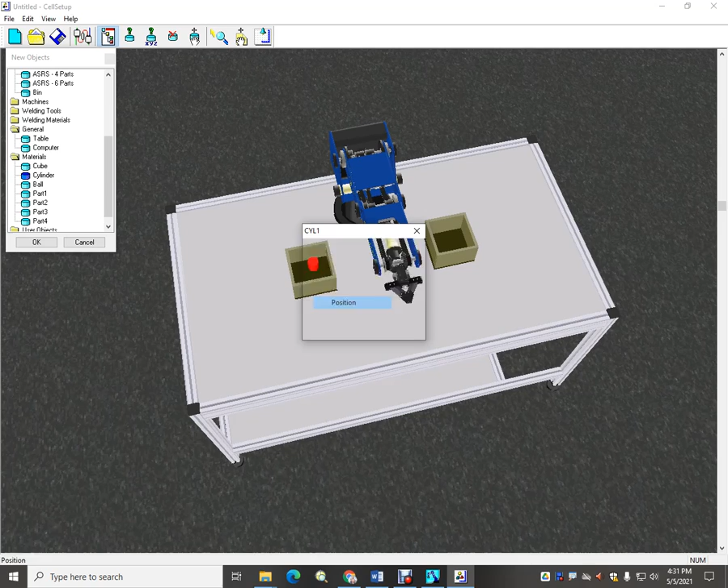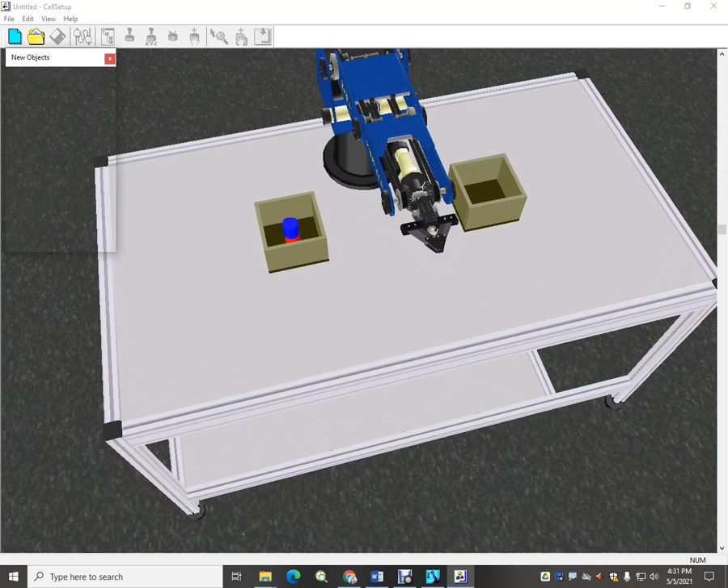We're going to place 2 cylinders inside the first bin. Red will be the first one. We'll locate its position at the same as the bin, 250, -260. And then we'll place the blue cylinder on top of the red. Be sure that you really zoom in. Make sure that blue then sits on the top of that, giving it the same position as 250, -260. Okay. So this is all that's required of our setup.

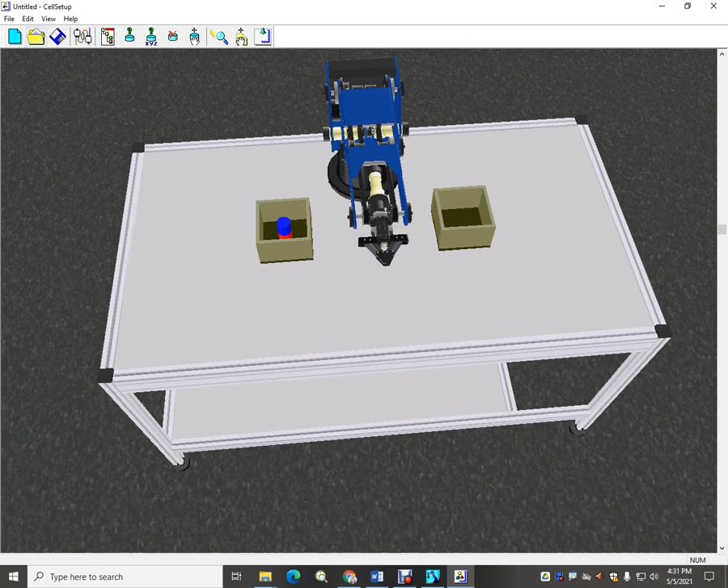Go ahead then and file, save as. Make sure you put it to the desktop; it is the easiest place to find it. And then let's save this as robot number 6.

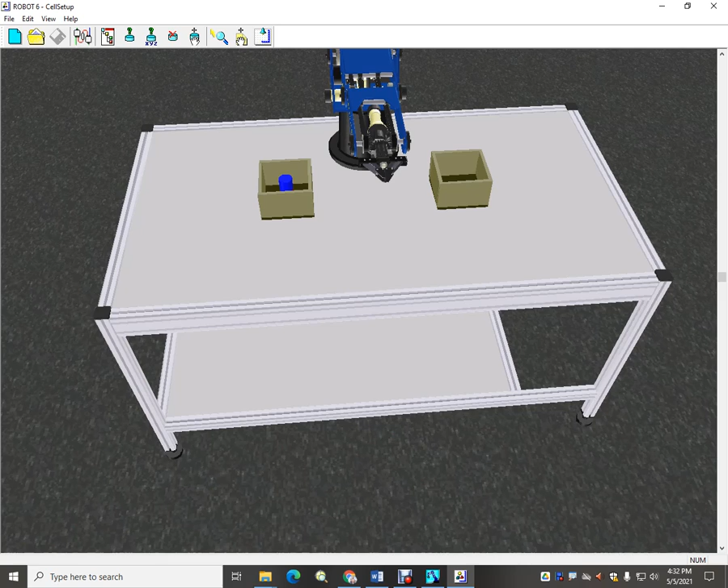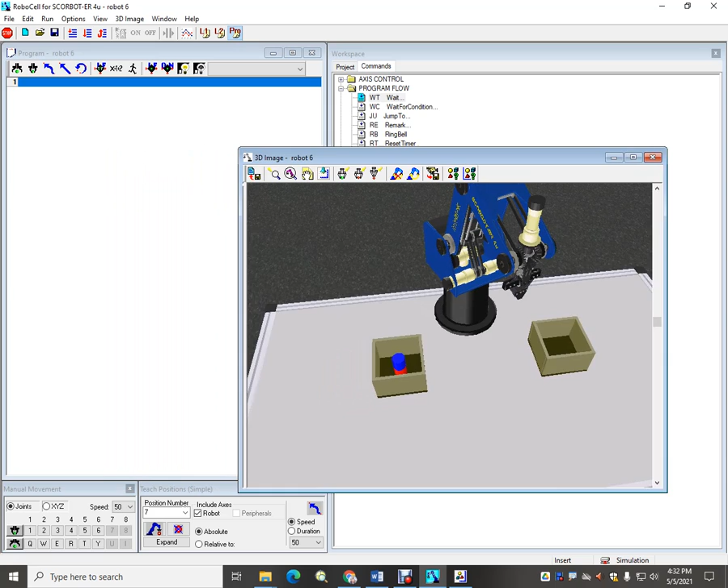Okay, I did it earlier today, it already exists, so that's okay. And we'll have it set the way we want it. Now, I'm going to go get our RoboCell. I have taken some shortcuts here though, in that I've already prepared this to accept our device, and I've already set up. So this is what we just finished for our cell setup. But in order to save some time on the video,

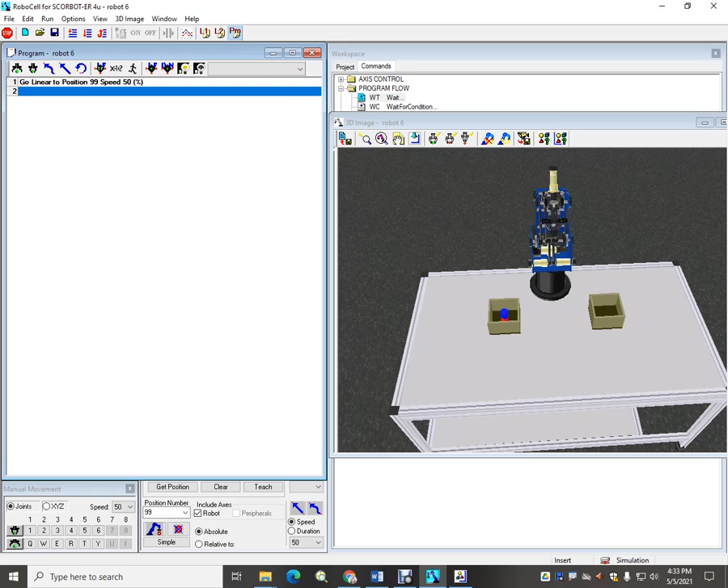I've gone ahead and recorded 10 positions, including our number 99 position, which we know then is our home position. And we could add that to our program immediately. Number 99 and open grip. So let's just watch those two perform. And there you have it. Now, I have the positions set up, and I have them in a dialog box right now.

So what I'd like you to do is pause the video, and for each one of the positions, I want you to record the XYZ. So for position number 1, your X is 250, your Y is negative 260, your Z is 20, your pitch is negative 90, and your roll is 0. Position 2, you see here, position 3. So make sure that you record the XYZ, don't record the joint.

So please pause the video so that you can record all the 10 positions that you're going to need, and you'll record it then in the box as we expand right here. So pause the video now and enter your 10 positions.

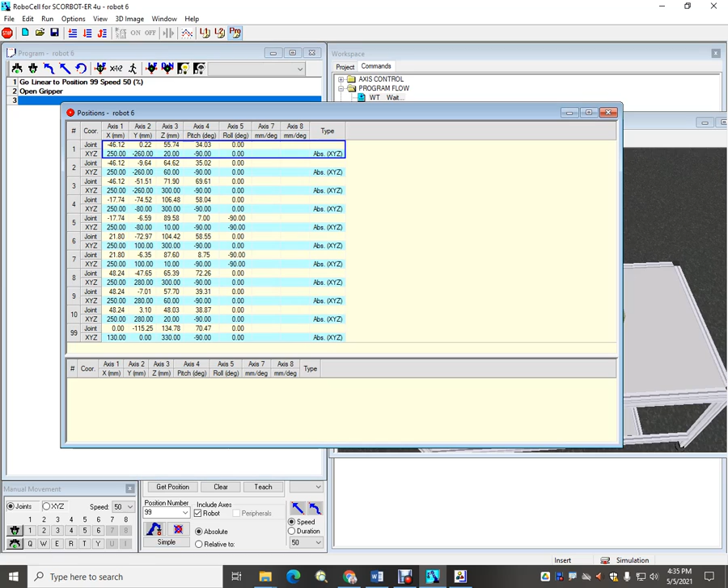So welcome back. The positions that we'll use will be 1 to 10. Position number 1 being the red cylinder, position 2 being the blue cylinder, and we're going to place it in 2 different spots. So position 2, 3, 4, and 5. Then we'll do 6, 7. And then position 8 is over the bin, position 10 will be the blue cylinder, and position 9 will be the red cylinder. So let's start adding those positions right now. So since we have an open grip, we can get started in adding our positions.

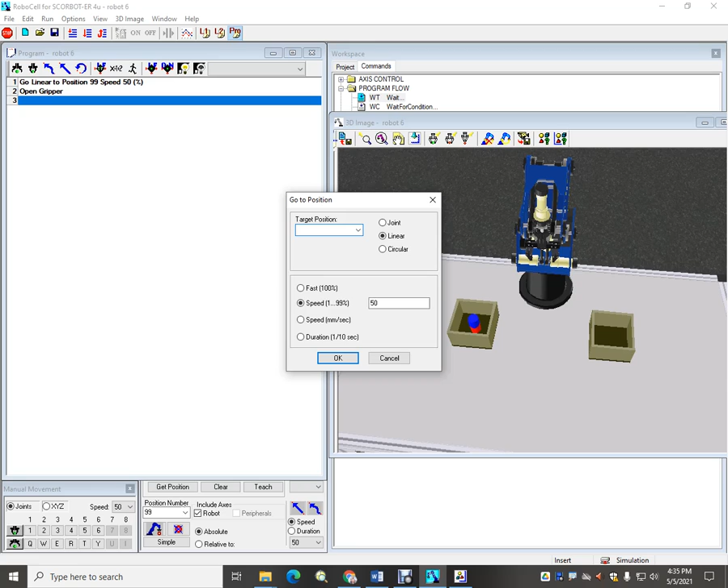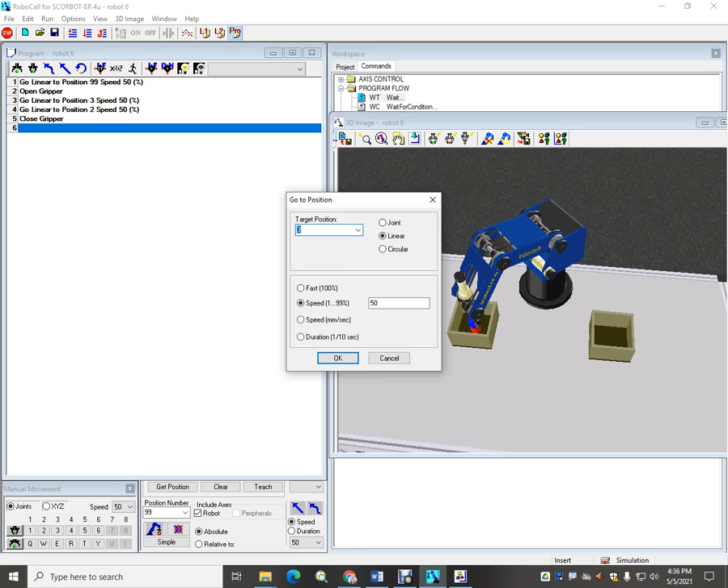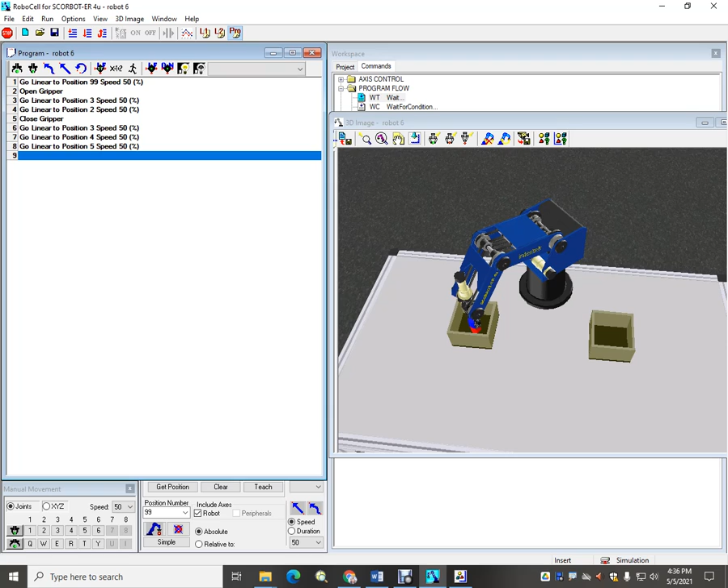So I want to get over to position 3, which will be over the bin. Position 2 is our blue cube. Let's watch that occur. All right, I'll want to close the grip. And then let's put in a series of commands here. So position 3, and let's move over to position 4. Let's do position 5. We'll be placing it on the table. Let's do that much. So let's watch it move through 3, 4, and 5.

All right, so you see position number 5 then has a roll, so you can see that we're asking it to move into a specific position. I'm going to want to open the grip at this point and then move back to position 4. Let's watch those two.

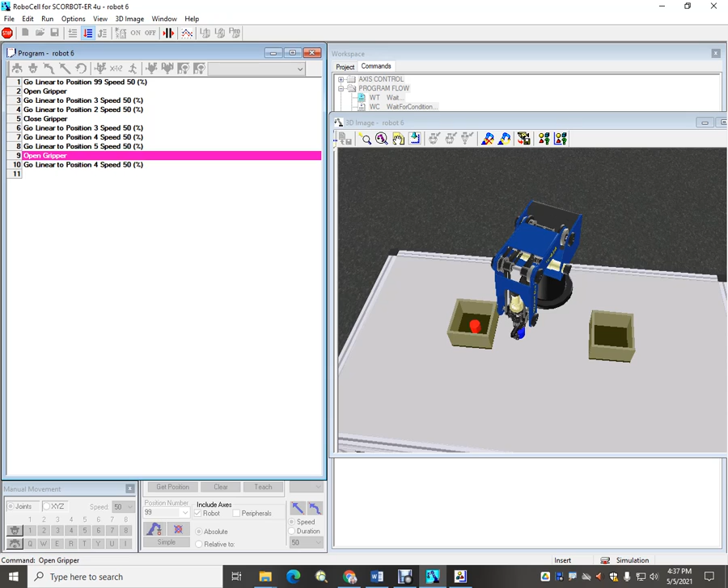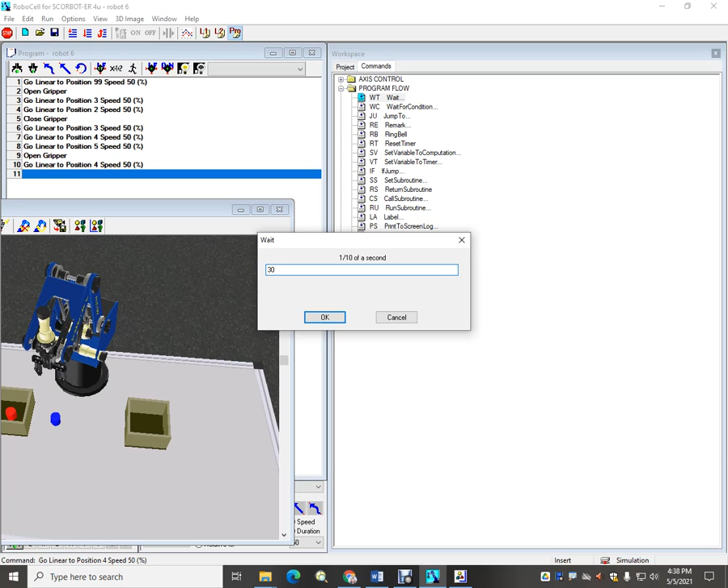Now the robot is to wait here. The pretend manufacturing process is occurring. I'm going to move this to this side because I need to have a wait command for this robot to be able to wait. And I'm going to put in 30 tenths of a second. That seems to be enough time for us to watch and nobody loses their patience with that. We can move this back.

So the problem is if we lose this and we close it out, as we reinstitute it on to the program, it doesn't necessarily fall right back to this position. Sometimes it enters back at a weird place. And then we have to reset the cell and start from the beginning. So now we're pretending to have waited for the manufacturing process to occur. We're going to now reach back for number 5. We're going to close the grip. We're going to move to 4, to 6, to 7, open the grip, and then move back to position 6.

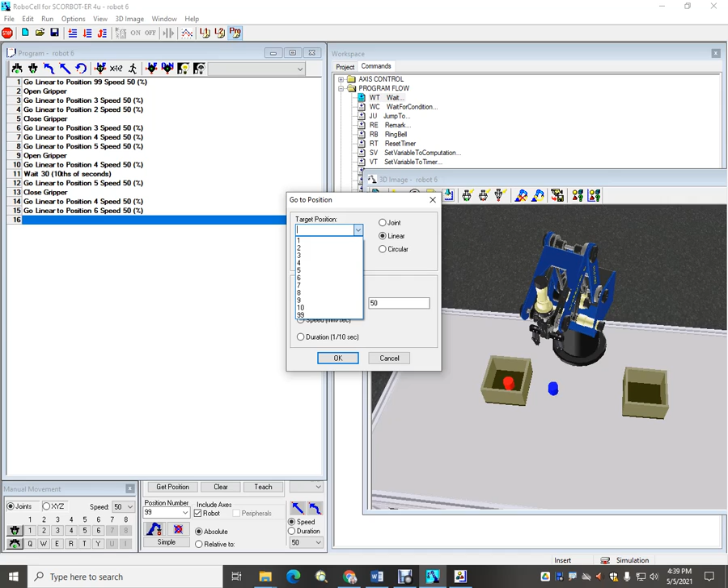So 5 allows us to grab the cube. We'll want to close the grip. Then let's go back and do 4, 6, and 7. So 4, 6, and 7. Now this is all on the handout of these positions. So let's start here. So it's going to go back to 5, close the grip, and then it'll do 4, 6, 7. So let's do a single cycle from there.

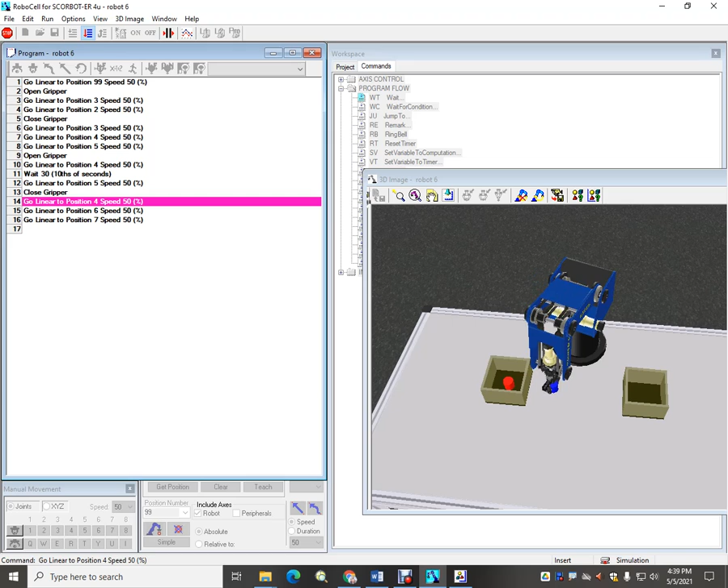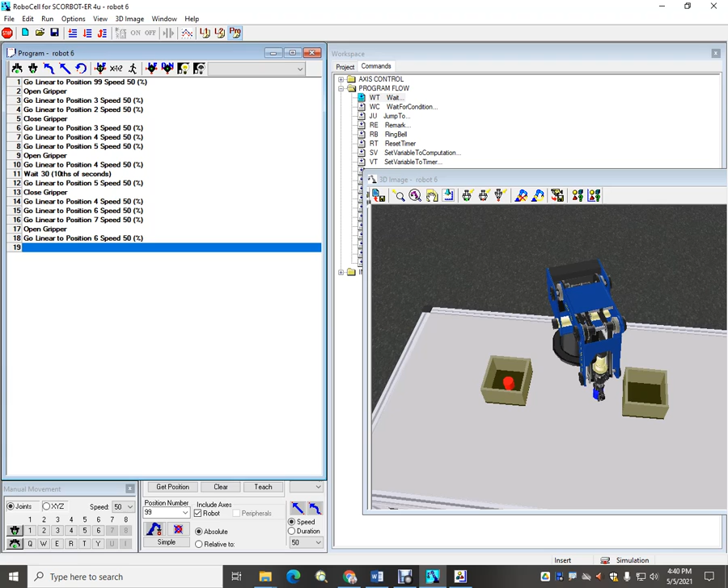Okay. We want to open the grip and then move it back to our position 6, which will be our wait position for the process to occur. And then add our wait time. Now here's the wait time.

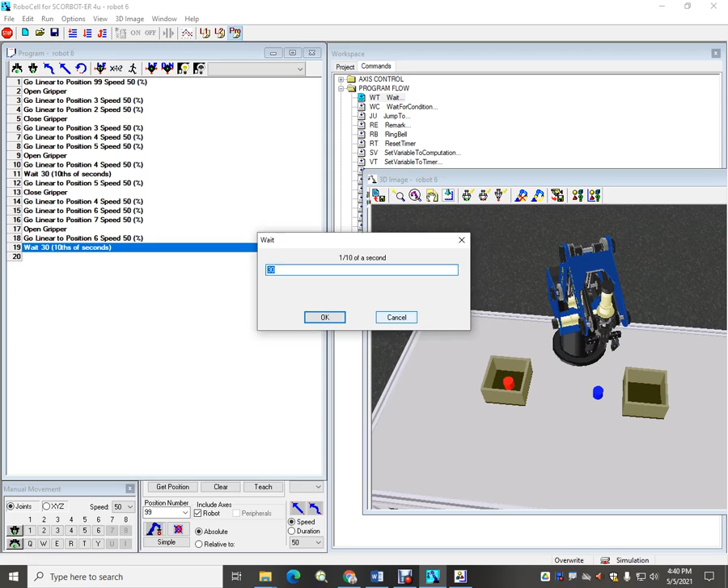So rather than reinstitute it, you can also copy by right-clicking, copy, and then paste, and then that would give us our same wait time. You can even adjust it if you want by double-clicking on it and putting in a new number. So it's waited now, and now let's take it to the bin.

So I'm going to then go back to number 7, where I'm going to close the grip, go from 6 to position 8 and position 10 to drop it in the bin. So here we go. 7, close the grip, back to our position 6, to 8, puts it over the next bin,

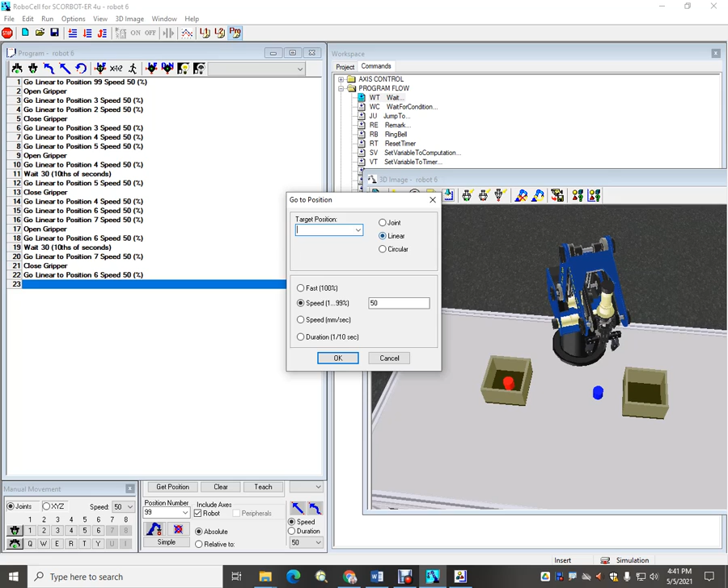and then to move this down and place it in the bin, position 10 is the first position within the bin. So let's start this then. Start it with our wait time, and then let's see how it goes.

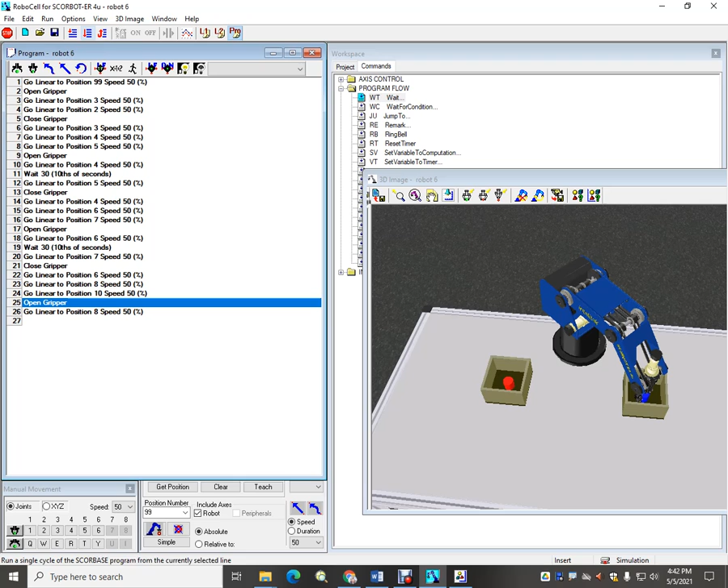All right, it's there. Let's open the grip, and then let's move back to number 8. So open the grip. Oh, open the grip, and back to 8. Okay, beautiful. Now, we are going to really do a shortcut here.

And since all of the positions are the same for the next cube, all we have to do is change out 2 positions to make this work. Position 2 was our blue cube. If I change that to position 1, that would be my red cube. Position 10 is the blue cube in our finished bin. If I change that to position 9, then that would be our red cube on the top.

So I'm about working smarter rather than harder. So if I hold the left mouse button down, I can blue in all of this, and then right click, and I can copy. Put the blue line at number 27, and I'm going to paste, and it instantly provides me with all the positioning that I need to make this work,

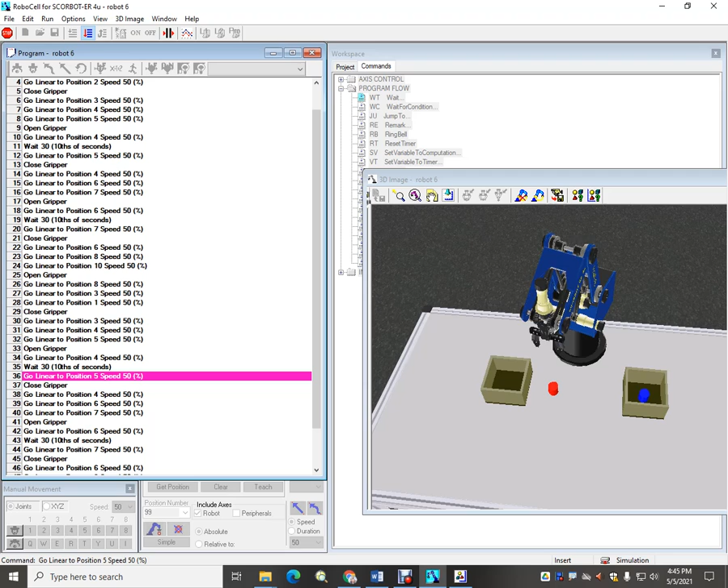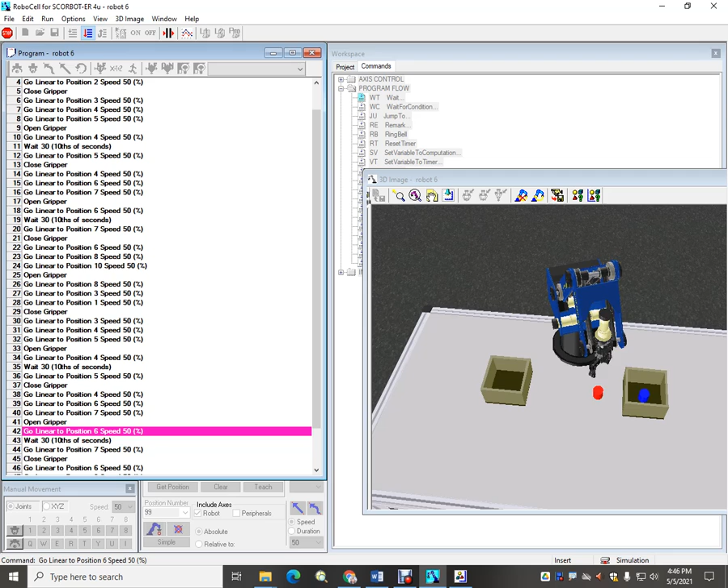All right, so we're putting it on the table. Back to position 4, here's our wait. We are simulating now that the machine process is occurring. It's complete. Move it now to position 7. And wait.

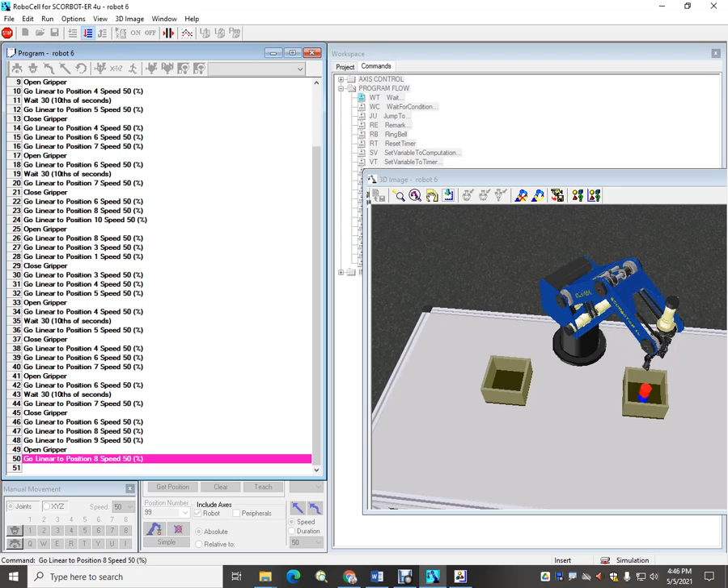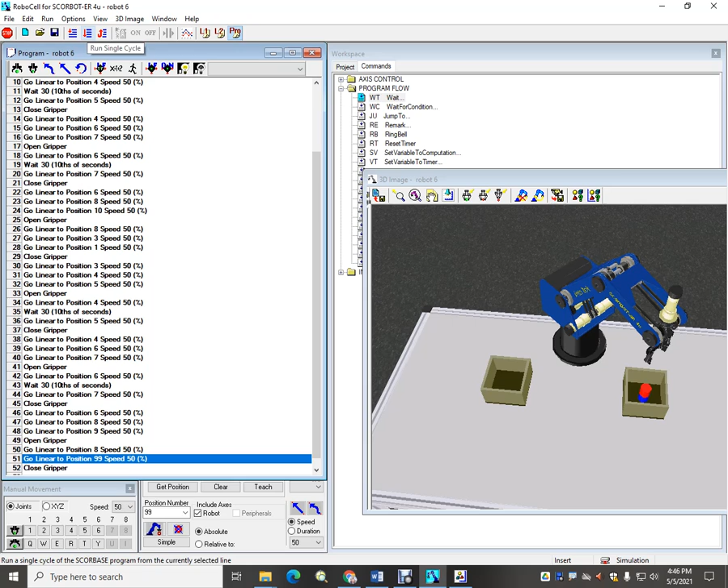So now position 9 would be where the red cube would go. Back to position 8, and all we need to do now is home. So let's head for home, position 99, and let's close the grip. Beauty. And there we go. Hey, it's complete.

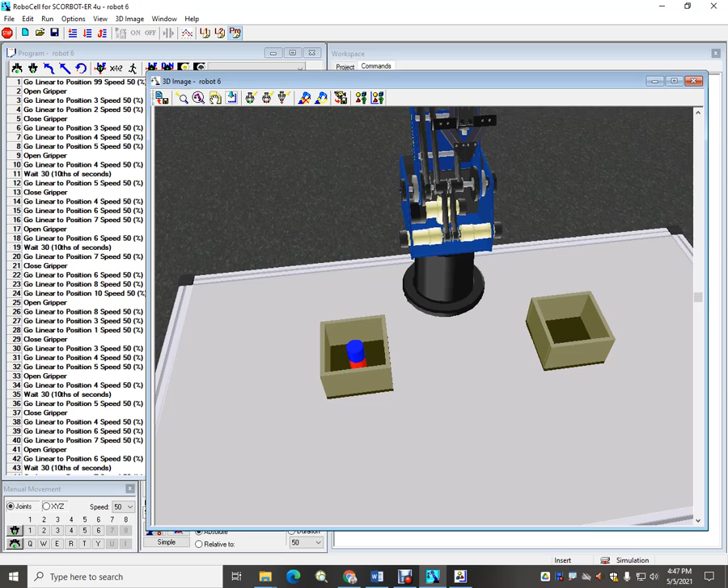So here's all we have to do now. Now that we have it all complete, we are going to reset the cell, and we are going to set this up so that we can watch it from the top. Start from position 99, and I am going to pause the tape momentarily, and we'll set some music, and then we'll start it.